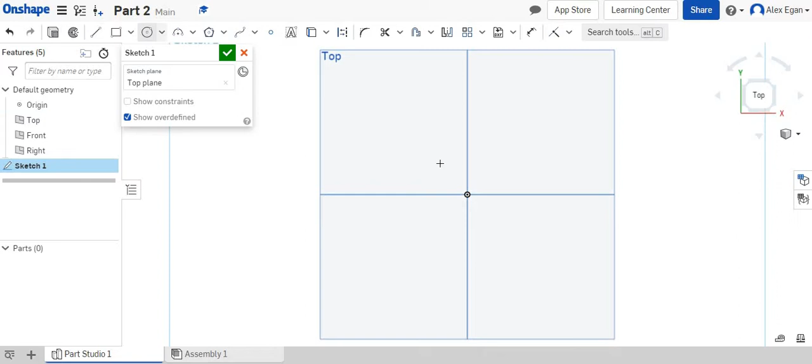And the diameter of these circles are 1 inch right here. And we know that the overall length from center point to center point is 1.5, and from edge to edge is 0.5. So I'm going to grab my circle tool, start right in the middle here, and make this 1 inch.

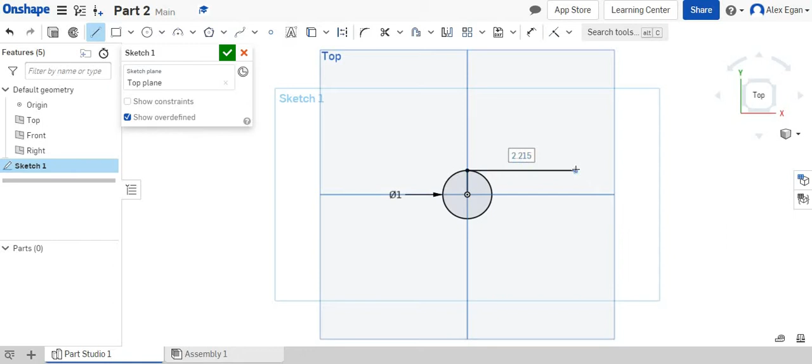I'm going to grab my line tool, and again, there's a bunch of different ways you could do this. If we click here, I don't think that's going to lock on, and it's not going to, so I'll just kind of start in the middle. We know that the radius is 0.5, looks good. We know that from edge to edge, or center point to center point, is 1.5 inches.

And then I'm going to go down 1 inch, go over, kind of just connect the dots. And now I have this center square shape.

I'm going to go back, grab my circle tool, line it right there. It should snap right in place. And I can actually just kind of drag it up here. And now I have this shape as well.

One more thing that we can do, we can actually just draw this little circle as well and not extrude that. Again, like I've said, there's a bunch of different correct ways to make this shape.

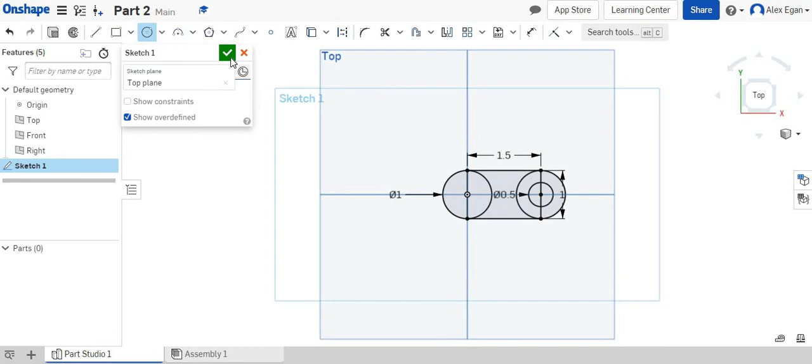So what I'm going to do is draw a circle, we're going to do 0.5. And now when we do our extrusion, what we can do is we can actually choose the areas that we would like, just like that. And the overall height of this first layer is 0.5 inches.

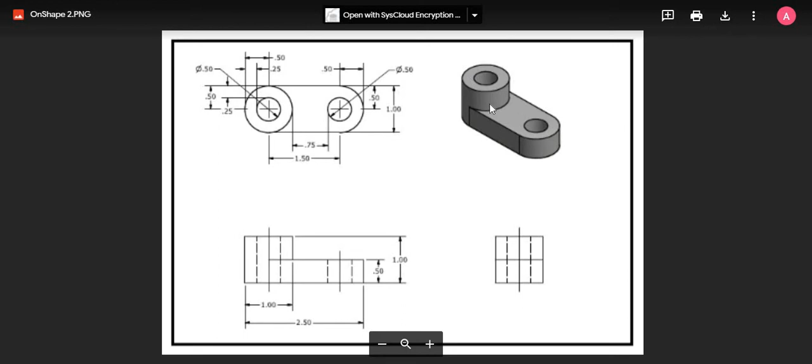So there is our first part. Now what we need to do is create this top portion. Again, this goes up 0.5 inches since we know this is 0.5 and the overall height is 1 inch. We can see that this hole goes all the way through the middle.

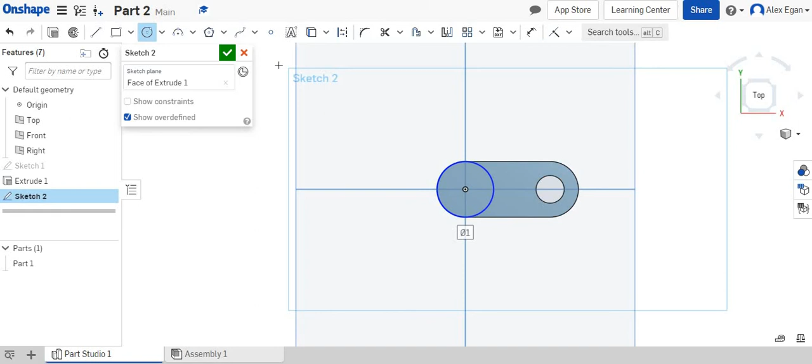So what we're going to do is create a sketch on our top face. I'm going to grab my circle tool and just draw another 1 inch circle. So what I'm going to do here is come and extrude this part right here. We'll say 0.5 inches.

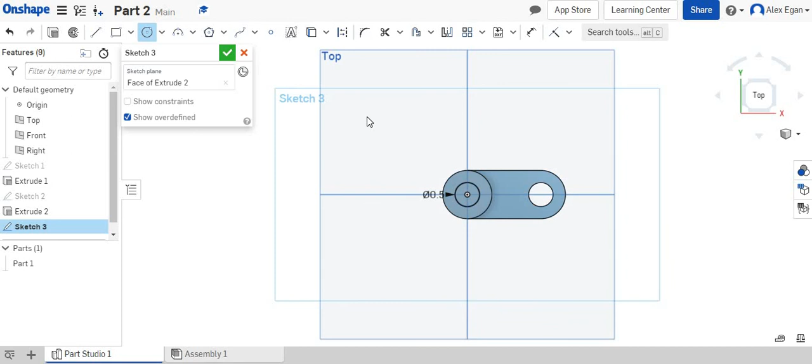And lastly, what I'm going to do is create a sketch on this top face. I'm going to grab my circle and create a 0.5 inch circle. Let's kind of rotate this around.

Let's do extrude. And I'm just going to click on this top part and say remove. It is only 1 inch thick, so that should go all the way through. It does. We'll say okie dokie. And let's take a look at this. That is beautiful. So that is how you complete intro part number 2.